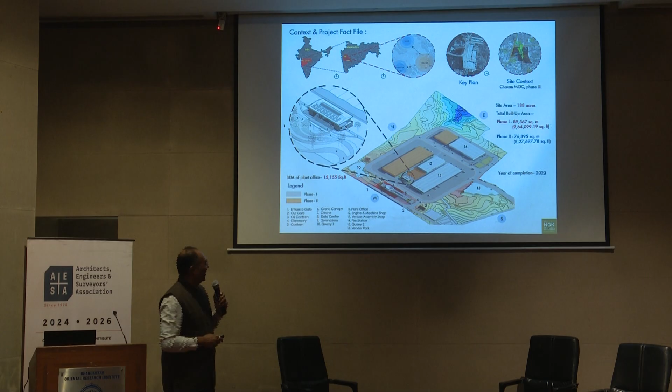I'm happy to say that the entire campus was built in 2.5 years flat. It's a proud moment for Made in India because it's the largest export plant of Bajaj. As we talk now, if I'm not mistaken, we have a 1 minute assembly time per bike at peak capacity of the conveyor. So India is now matching up to the world. The new KTM is being assembled here.

Now, to ensure that when we are looking at such a large campus, there has to be an inherent theme. For us, the three S's - synergy, sensitivity, and sustainability - are inseparable.

I didn't want my project to be designed and then have us pad on a cosmetic rating. I wanted my project to holistically be sustainable. So we did a lot of studies - this is part of my design research that happens in the studio - in terms of how buildings are placed.

How water is saved - we had 2 perennial quarries at the site which we rejuvenated. How buildings are oriented, how materials are used.

A lot of learning from Laurie Baker has been used in this project at a big scale, in terms of rat-trap bond, filler slab - I'll come to that. How spaces are ventilated, how light comes in, how do we use steel to create lean design, how do you reduce steel.

All this was done, and all these sketches I'm putting up because these were the ideas which were discussed in the meetings with the client, because you have to get everybody on the same page. So the idea was to be very holistic.

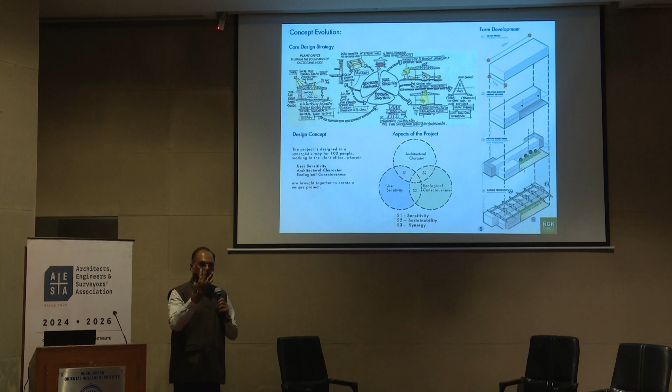Things like that. So the 3S principle - sensitivity, sustainability, and synergy - actually became the three markers, three forces which drove us. And then this diagram actually explains the evolution.

So it started with a 45 meter by 15 meter block. Then the plant team that is going to run the office was to sit at the ground floor. So we said we'll take a split level, because the upper level floor was sparingly occupied - so we have 50 people down, 50 people up. And then we said that all these people are going to get nice east light, but this sparing team is going to get west light.

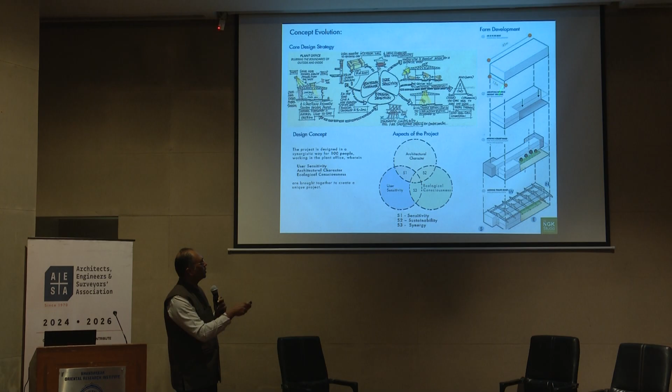So we need to shade them, so there is an overhang here. But then many of them are going to be on this part of the office, so can we get the landscape in? That's how the green spine entered into the office. And all this was then kind of given shelter with a 13 meter high roof. So we have a 15 meter span, and this way, with the staircases, it's 53 meters, but otherwise 45 meters.

I'm purposely showing these sketches. All these sketches are made in meetings, in design workshops, to actually reason out how simple a nice office building can be with a split level, with landscape coming in. It's not complicated at all. The lines of structure, the lines of function where the workspaces are, and the landscape all talking to each other, and the servant spaces and the transition spaces, and how that becomes a section with a split level. The meeting rooms purposely put on the west, with a double height space. We wanted trees, but unfortunately trees didn't come—maybe in the next project. The whole idea was that this landscape spine literally cuts through the office and goes outside and becomes an inviting landscape.

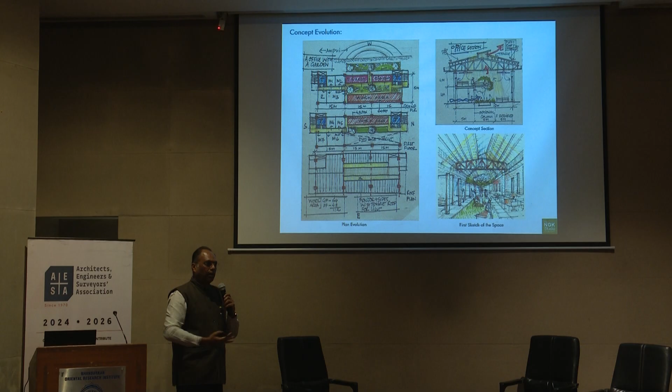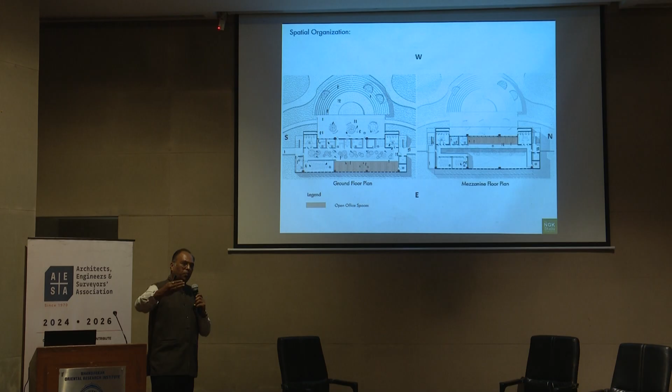Now I'll show you the spatial organization of the building. We opened up the east, with slit windows, not very big, so you get very optimal light. All the workstations were planned perpendicular to the plane of work, so you get side light and don't get glare on the screen. That also happens on the west, where we have windows but with a big overhang, so you get diffuse light again.

The enclosed spaces, most of them were planned on the west to insulate the inner part of the office. Part of the meeting rooms, because this is fresh morning light, we thought the meeting rooms should be here, were kept on the east on both floors. Then this is the green spine, which cuts through, but the central part we thought would be a nice collaborative space, so people from upper floor, lower floor could come below and have events there.

In this we had openings so that the southwest breeze cuts through the building. Then the servant spaces, where we have the pantries and restrooms, were at the ends. And then we have the transition space, which kind of...

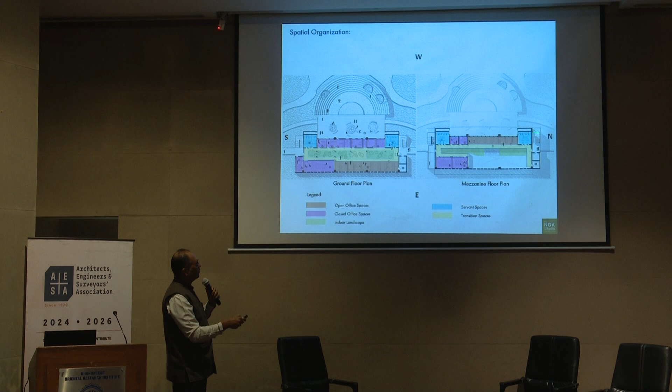Why 45 meters and 53 meters? Because at any time you can run 22.5 meters, which is within the fire code. So that was also looked at very carefully. And then this is the staircase at the end, so this run distance is 22.5 and 22.5 at the ends.

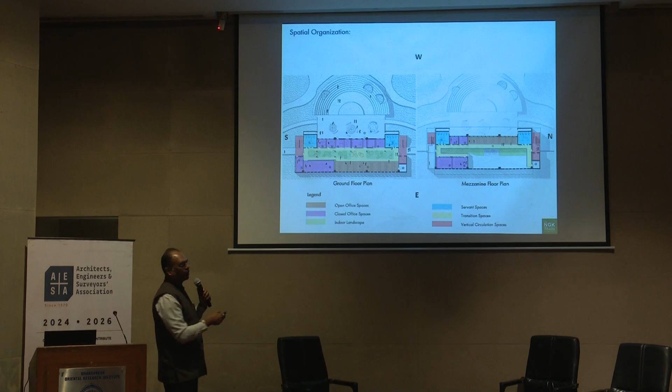On the west as well as the east, we had planned solar. By the way, the entire planned solarification for this whole plant is almost 5.5 megawatts. It's taking time, but it's beyond platinum. As and when it is done, we can have almost 50% of our power needs on solar.

In terms of ventilation, we've used a system of HVLS fans with evaporative cooling on either side, which creates a current, so we straight away save almost 75% of energy. We don't have the typical air conditioning—it's used maybe twice a year. Almost 10 months of the year we don't need artificial air conditioning, we just need fans. So look at the saving that is there.

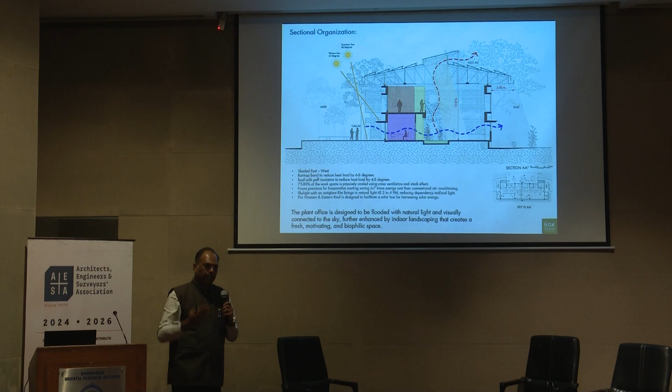All these things are easy to talk about, but they have to be quantified and justified. For every project, whether it's green, platinum, whatever, I don't believe in labels. I feel it's my responsibility first as a professional to have a holistic green agenda for every project I do—it's like a prayer in the office. The green agenda is based on 5 elements of nature, Panch Mahabhutam.

Air was looked at in terms of cross ventilation and ideally a zero air conditioning goal. Zero air conditioning goal doesn't mean air conditioning is not there at all—the server room needs air conditioning because of heat dissipation, and the meeting rooms need it too, but they are just 15 to 20% of the overall area. For the rest of the area we've used evaporative cooling with HVLS fans, which reduce 4 times the need for artificial air conditioning. Generally, regular air conditioning would consume 7 watts a square foot; evaporative cooling just consumes 1.5 watts a square foot. That's the kind of saving.

And then all the rainwater is harvested in these gutters, and then it drops down and is harvested in the quarries that I showed you.

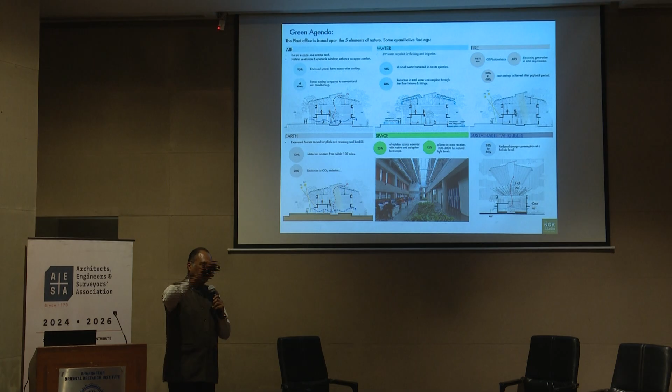For earth, we have reused the entire murum from the excavation for plinth, for gabion walls, for retaining walls. We have not allowed the murum to go out. And most of the material, except for the exposed brick which came from Godhra but was stocked here by their stockist, was sourced within 150 to 160 kilometers.

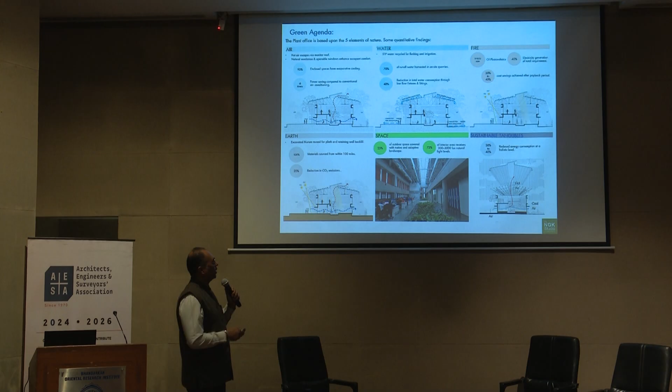And then, when we've done a proper energy balance at the end of it, this is the proof of the pudding. We have had a very high percentage of less embodied energy, and almost 38% operating costs are saved. We have done an energy performance index which is almost 65, and now we are trying to go towards 50. So the minute you cross 64, I'm told you are in the super ECBC league.

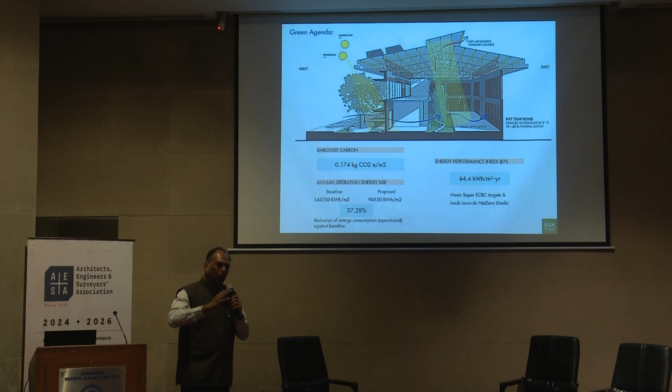Mind you, all this was done during the design process, not afterwards. Everything was done while we were designing, as part of the design process. So I'm very happy that this is almost net zero once the solar comes up. There is a catch to it.

Materials play a very important role, and here I must give a lot of tribute to Laurie Baker, whose techniques of low cost construction we have experimented with in a big way in this project. So we have used filler slabs, brick jalis, and rat trap bond. Even the bricks that we used from Godhra had a low combustion percentage, almost 50% lesser than what you get in a regular brick. They are wire cut bricks, no plaster, no paint, so the contractor cannot make a mistake.

With the rat trap bond in a 9-inch, actually 220 in this case, we are getting an 8-degree reduction from the west and east side. So for the air conditioning system, with outside temperature being 40, 8 degrees cuts 32 to 23 as my delta straight away. Almost 16 to 20% saving we achieved, averaging around 17 and a half.

Material cost was also reduced because in rat trap bond the number of joints reduce, and we also got cavities to run conduits and things like that. This is interesting - all this murum is from our site, used for gabion walls, plum concrete, as well as for the plinth.

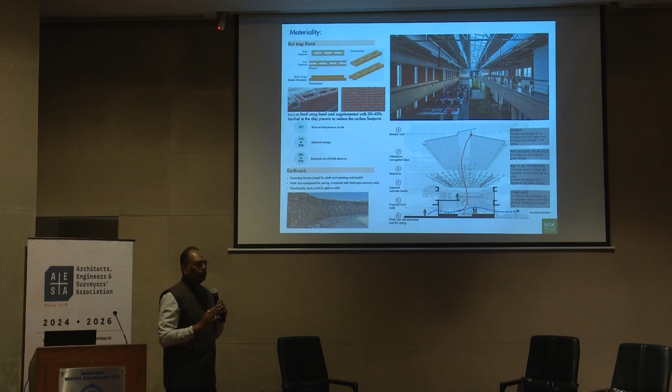So by innovative lean design, we've actually reduced the steel consumption in this building. Of course here it is a little less because we have a steel truss, not an RCC slab, but even then. And then the exposed brick walls, as I've already told you, are in rat trap bond, and the plinth is from recycled murum. So a lot of care was taken in how materials are used and carefully orchestrated.

In terms of the landscape - landscape is the last thing people want to do, whatever is left over. So we were very conscious that at the entrance in this sector, we use plants which have low maintenance, but at the same time they become a kind of foreground for the building.

The paved areas had to be covered because of heavy rain and heavy wind in Chakan, so that is only stamped concrete. The rest of the area is actually taking in water throughout the year. All the landscape is on drip, and we are using STP recycled water, almost 1 lakh liters on a daily basis to reuse, except for edible landscape. All other landscape gets recycled water.

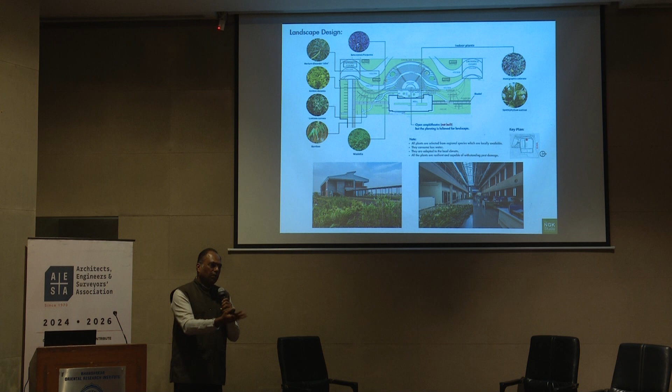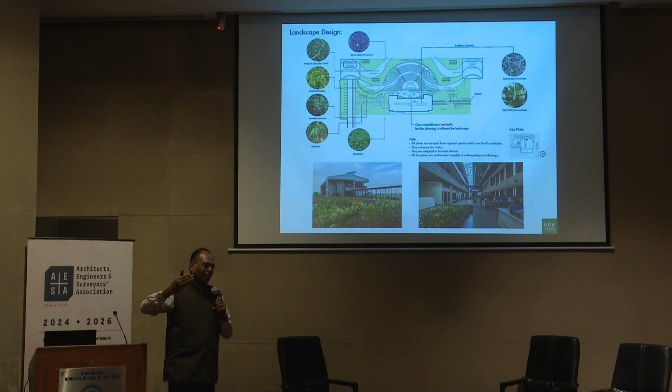Inside, we have used plants like peace lilies and things like that where you don't need more water - they are indoor plants. Most of the plants are locally available and have high resilience to pests, because that is very important. So again, very simple strategies, but in terms of plant selection, we wanted the landscape to actually grow over the years, creating a paradigm of time.

So the building has an excellent spatial connect and community connect amongst people. In this collaborative space, festivals are celebrated. It's a very democratic office space. There is no cabin, everybody sits in one type of workstation, even the plant head. It fosters a kind of environment of collaboration and co-creation, because these are the people running one of India's largest motorbike plants.

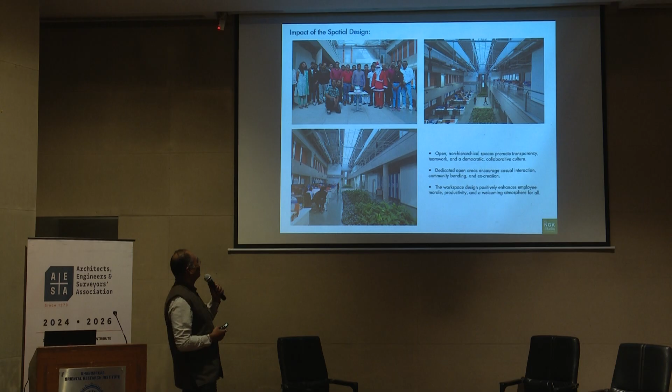And there is no hierarchy, no hierarchy in terms of your junior, your senior. Everything is very nice and open. In fact, whenever I have walked in here, I make a point to have a cup of tea, and it's very good to hear that we really like our 8 hours here. That is the biggest compliment you get from the end users.

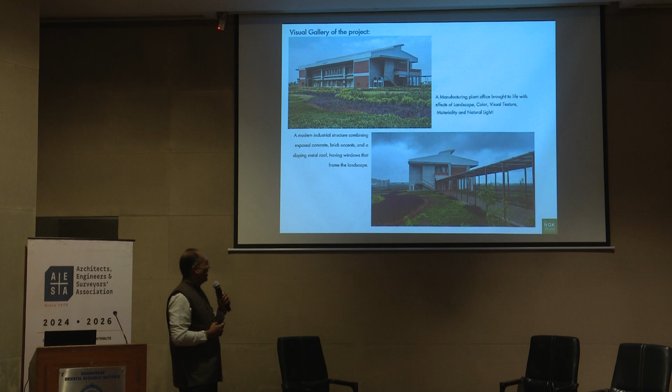Otherwise, a lot of work is required to get buildings done in such a way. So this is a blown up shot to show you how the building looks, and those C-beams. Again, we had to put spikes for pigeons, because pigeons go and sit there, so the spikes are inside. And then these are the toilet shafts with the ventilation jalis on top. So it's all integrated.

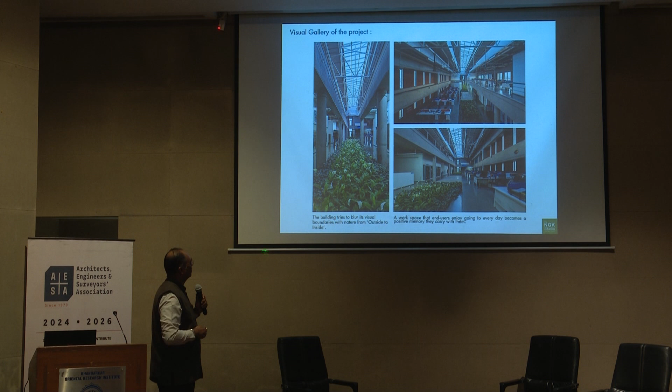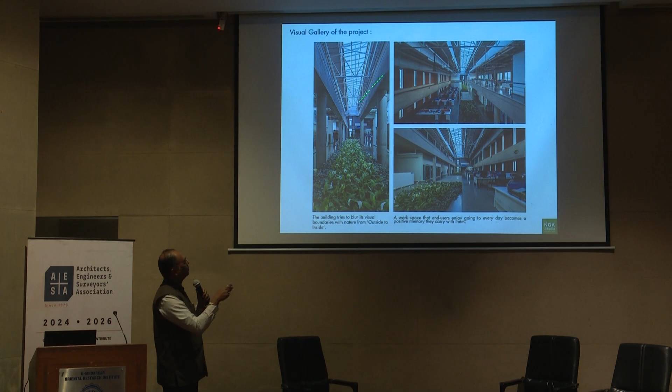These are the shots inside. So we wanted the landscape to blur the boundaries between the built and the unbuilt, and the landscape just goes in and then opens up into these collaborative spaces and really fills up the whole space with light, beautiful light coming in. And you can see the visual integration here.

We've done PU treatment for all the trusses, which gives us a shelf life of about 15 to 17 years minimum. And all this is exposed.

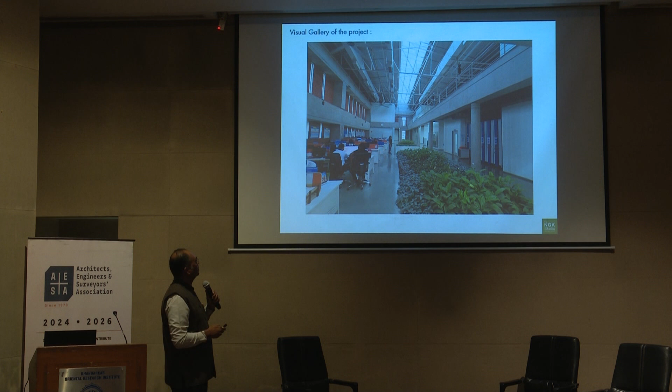And I just want to end with this, that we're very happy that the space continues to leave a positive sensory and memorable experience. Whenever I go there, I see smiling faces, people coming and telling me, this collaborator had come, this fellow had come. They really like it. And I must say that a lot of the original ideas that were envisioned have manifested into the space. I would say 85% have manifested, 15% is circumstantial. And it's a great team effort.

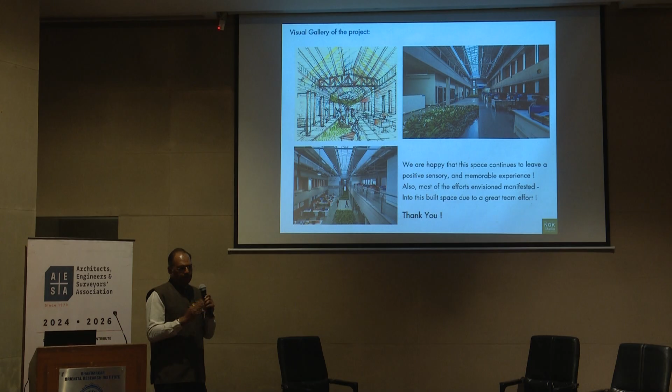I just want to thank everybody who is present and not present, that without them this building would not have been possible. Thank you.